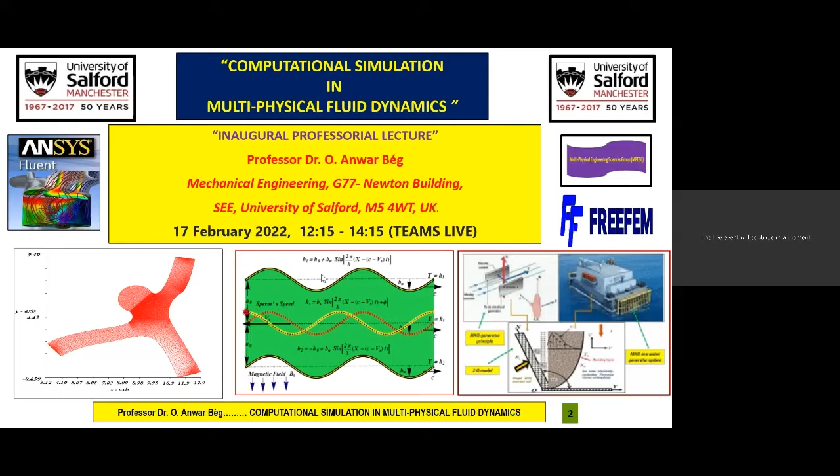Thank you, Carl, and thank you all for attending. As Carl mentioned, the focus of my lecture today is computational simulation in multiphysical fluid dynamics. And what I'll try to do in this lecture is review the kind of work we've done at Salford specifically over the last 6 years, both at undergraduate, at postgraduate, and also postdoctoral level, and also with my own research interfacing with international bodies.

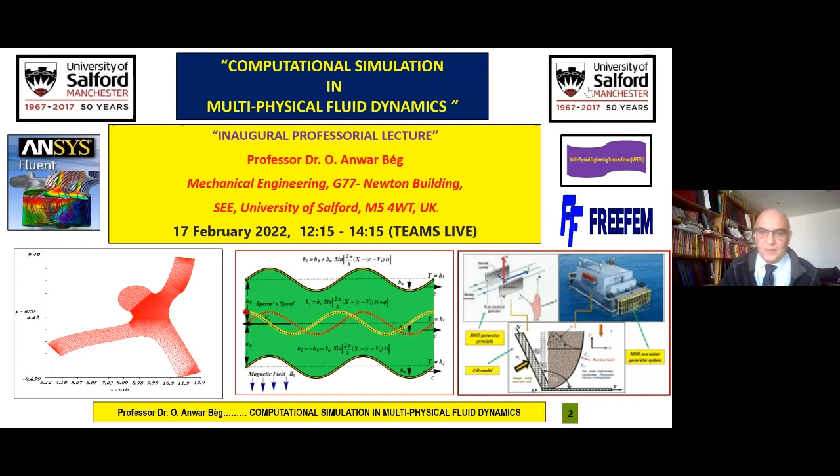I'll start off with just a summary of what it means to work at Salford University. The university motto is Altiora Petamus. My Latin is not something to boast about, but this means in English, let us seek higher things. Now, within Salford, you'll all be aware there are hundreds, if not thousands, of businesses. We're living in a global culture, but there's only one university. This gives us a very unique position in Salford and also in Greater Manchester and wider afield to develop intellectual pursuits.

And this has been what we've tried to gravitate around, certainly in the small group that I've developed, in pushing the intellectual pursuits, which will eventually develop into commercial interests. So here we'll give you some examples of the kinds of things we've tried to do. There's the coat of arms of Salford for those who are familiar with it. The presentation will comprise roughly about 5 sections.

And just to summarize, computational multiphysical fluid mechanics, which is a bit of a mouthful, really crosses many boundaries. But the 3 principal areas that I've worked in, certainly in the last 10 years, are aerospace, which includes both aeronautical and more specifically astronautical. So we are seeking higher things because we're going higher in terms of altitude, if you forgive the pun. Also energy, which is an important indicator of the global economy now.

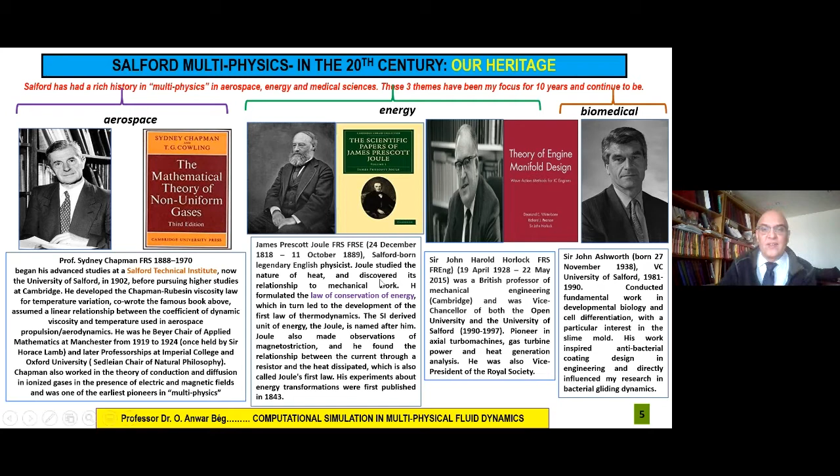At the moment, what is multiphysics in the 21st century at Salford? Well, there's 5 members of the small group that we created called the Multiphysical Engineering Sciences Group. A good colleague, Dr. Leonard, who teaches thermodynamics, Dr. Jury, who specializes in composites and structures, Dr. Kadir, who later will be accepting questions during the Q&A session with you, myself, and then a new PhD completion, Dr. Kohara, who's joined the group now and has been with us for about 6 months, but has been a student at Salford for 10 years.

So together, we try to cover as much as we can in terms of complexity and diversity within multiphysics, which you'll appreciate a little bit more when I explain exactly what it is that we do. So without further ado, what actually is multiphysics? Well, as the title implies, it involves physics, but multiple things happening at the same time.

Any student of A-level physics will appreciate there are different topics like thermodynamics, which involves heat doing work, heat transfer, which involves the transmission of heat from a hot place to a cold place. It occurs everywhere on the planet. At the moment, it's very important in climate modeling. There's also electromagnetic fields, electrical fields and magnetic fields, which kind of move like a snake at orthogonal directions to each other, but they coexist.

And the nature of multiphysics is that many things often flow. So you may have different kinds of fluids. You'll have chemical reactions, which brings chemistry into it. You'll have acoustics, which involves vibrations and sound propagation. And then you'll also have things like structures, material deformation, rigid bodies and stuff like that. So what multiphysics does is it unifies these disciplines, but not necessarily all at the same time. So it's a bit like going to ASDA and pick and mix.

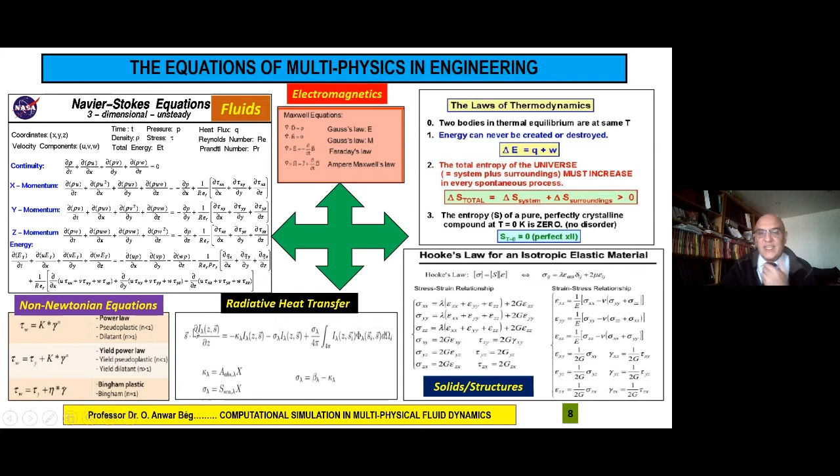And you can also have convection, which is how you get hot water. Heat moves in a cup. Or conduction, which is why your feet feel cold if you walk barefoot on the tiles in your bathroom in the morning. Heat leaves the body through solid body heat transfer. So all these things can happen. And here we'll just give you some ideas of how we've combined different components of them in our work at Salford.

So how do we actually solve those equations? Well, you can appreciate there are many equations I've shown there. And although mathematicians have pushed the limits as far as they can to get closed form or hand solutions, in the real world, when you have geometric complexity, for example, this pencil may look simple, but it's actually quite complex. It's got hexagonal structure to it. You have to use computational methods, not just for the geometry, but also to cater for the complexity of the physics. So some of the softwares that have been developed to do this kind of work are visualized here.

You've got MATLAB, which is very popular with undergraduates in the control and dynamics discipline. We also use it in fluid mechanics. ANSYS is a finite element solver. I'll explain that in due course. But this can simulate complex geometrical problems, whether they're aerodynamics, fluid mechanics, corrosion science, impact engineering, roller coasters, you name it.

As long as you can simulate the geometry, you can bring the physics together, and you can predict things like stresses, strains, velocities, pressures, the things that engineers are interested in optimizing to get a good design. There are also codes like FreeFEM, which is a French software that gives you a little bit more leeway in developing your own user-defined models, because there are materials that are emerging in industry which don't have mathematical models that have already been inbuilt into these commercial softwares. You have to write the codes yourselves.

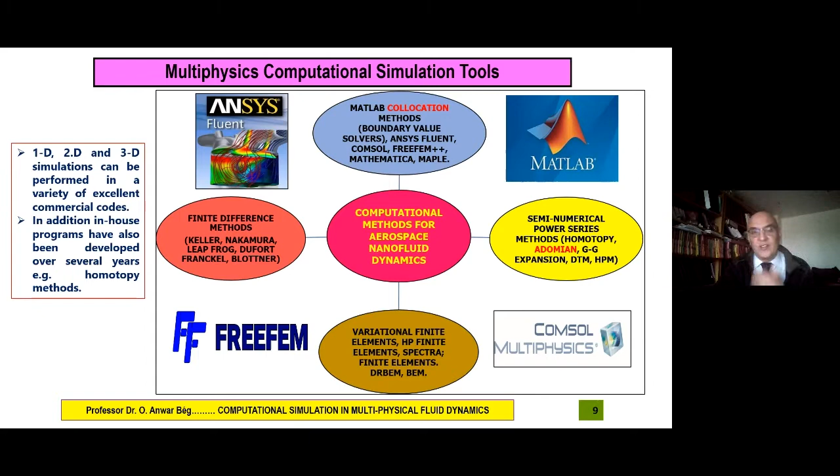Now, how do we actually solve a problem? Well, as I said to you earlier, it's a bit like going to a superstore and picking and mixing different sweets. But the basic idea is the same. You first have to define what the problem is. You have to have a physical understanding or appreciation of what you're looking at. So it might be blood flow in the human body. It might be a new green energy system like a photovoltaic cell on a facade. It might be a wind turbine. It might be a novel aircraft wing.

It doesn't matter what the system is, as long as you understand and define what you're going to simulate and what part of it you're going to look at. Are you going to look at the structural side? Are you going to look at the fluid side? Are you going to look at both interacting together? Are you going to bring heat into it, vibration into it? You have to define the problem physically first. Once you've done that, that's when you ascribe the mathematics. So the mathematics converts the physical problem into an analytical statement or a mathematical model which tries to represent what the physics is to the best of our ability. And then you can proceed with actually solving that problem.

So you need things like data, material properties. You need things like boundary conditions. What's the inlet velocity to a gas turbine blade? What's the oncoming velocity or the flight velocity of an aircraft? What's the impact force on a landing gear when the aircraft's landing on the runway? Or what's the speed of a motor car? It doesn't matter what the problem is. You have to have that data. And that's usually prescribed by virtue of experiments and laboratory testing.

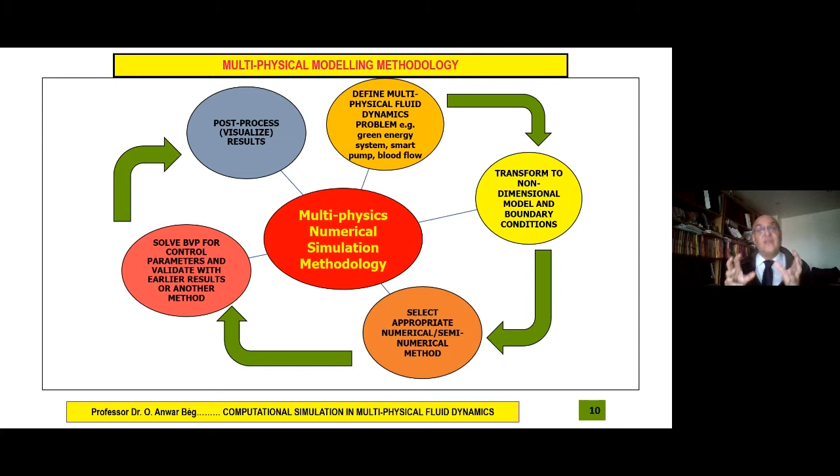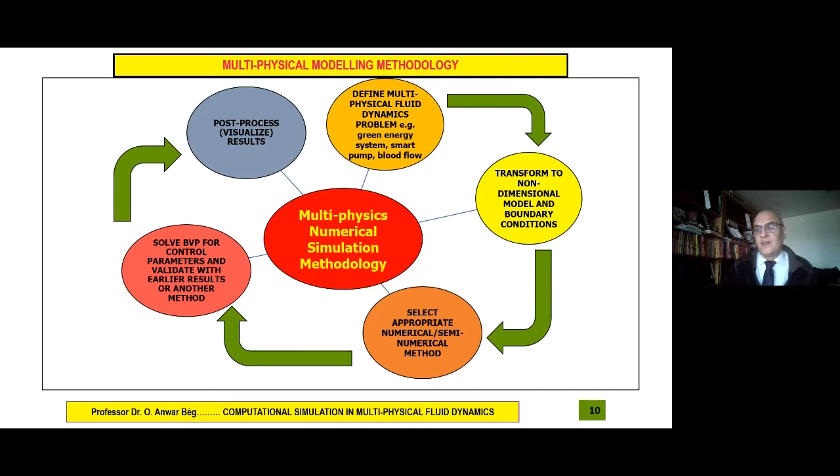So what you do is you define generically what's called a boundary value problem. It's a differential equation system. It's got the maths in there. It's got the physics in there. It's got the data and boundary conditions. And then you can solve that problem with an appropriate numerical method, of which I gave you a few examples earlier, like ANSYS or MATLAB or COMSOL. It doesn't matter what the method is, as long as it's appropriate to the problem you're trying to solve. Now, the final part could be argued to be the most exciting, which is where you visualize the results. So you show nice pictures, contour plots of what physically is going on when you change a particular parameter. That's an important point to get across.

Now, over the last 10 to 20 years, I've worked with many different groups. Carl mentioned a few of them in his introduction, but these are largely international, and the different areas we've worked in. So with Dr. Khan, I've been working in hybrid fuel cells and dielectric materials. He's based in Scotland, Robert Gordon University. Another example is Mr. Mohammed El Gendy, a former MSc student who works for Alkan Medical. We've done a lot of work together now in medical engineering simulation. Most recently, COVID.

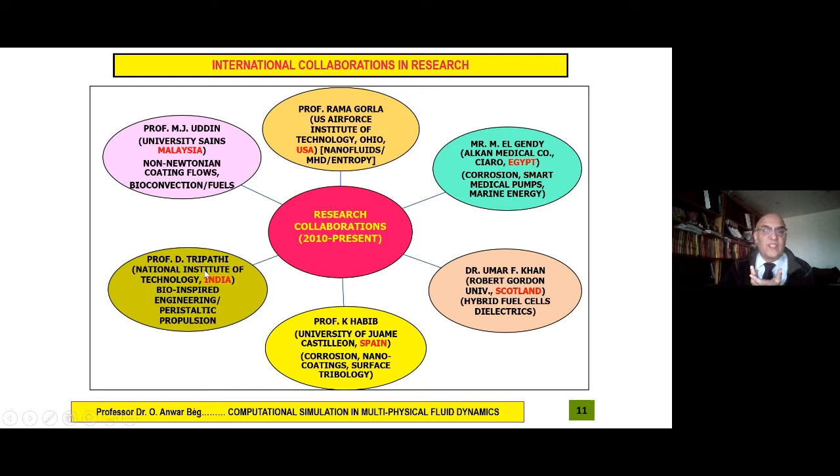With Professor Rama Gorla, a very distinguished engineer from the United States, we've worked on nanofluids. He's based at the United States Air Force Institute of Technology. And with various other individuals like Professor Habib in Spain, Professor Tripathi in India, and Professor Uddin in Malaysia, who looked at non-Newtonian flows and corrosion, and also other aspects of electromagnetics.

So just to quickly summarize the kind of work we've done in the last 12 years, which is what this presentation is really focused on, is aerospace, energy, and medical engineering. And I've extracted a couple of examples from each just to give you a flavor of the type of work we've done, to share with you the kind of learning that we've tried to develop. But the main focus really in aerospace is high temperature, things like nano coatings for gas turbines, which is the research interest of Dr.

Kadir, but also we're interested in things like rocket fuel tank sloshing, rocket splashdown. If you've seen the movie Apollo 13, you'll recognize when Tom Hanks descends into the ocean, that kind of thing, but also novel functional materials which respond to their environment. They're intelligent materials. This is what's happening in modern aerospace.

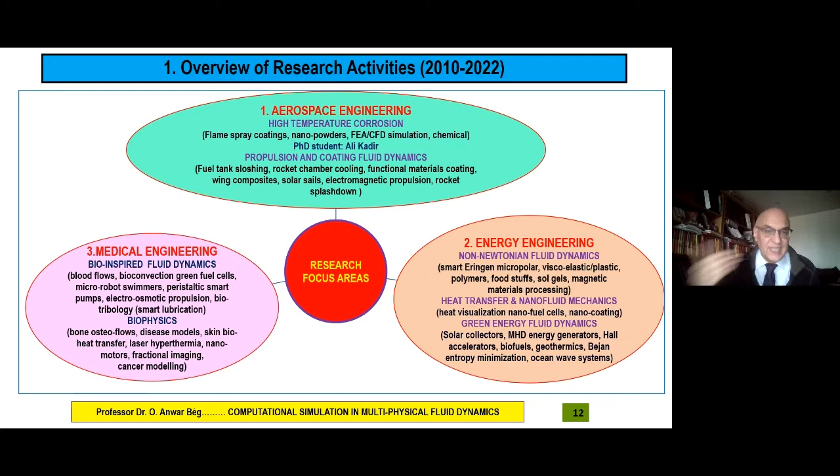In energy, we've looked at non-Newtonian materials processing, sol gel coatings for photovoltaic collectors, geothermal engineering, and also entropy minimization in various branches of green energy. But a big area that we've really begun to mainly focus on since the pandemic has been bio-inspired fluid dynamics, where we're using ideas from biology to improve engineering systems, but we're also modeling biological systems as they are, things like blood flow through the heart or kneecap injuries, things like that.

So the 4 examples that I'll share with you, you'll appreciate, I could have selected from over 600. All were published in journals, so it's a very small snapshot of what we've done, not just at Salford, but in my entire career. But they're quite generic in the sense that the approach is similar, but different aspects of multiphysics have been used, and they've all been inspired by real problems. So the first case I'll look at is the water ingress problem, which Carl mentioned, to do with ice melting and how it penetrates composites, because increasingly aircraft engineers are using composites.

Then I'll quickly mention the bio-inspired peristaltic pumps, which is where you're using an idea from swallowing, how the human being swallows through the esophagus, to propel liquid. It's the most efficient mechanism for internal fluid propulsion known in nature, and it's being used by NASA at the moment in designing rocket turbo fuel pumps. Then we'll mention things like magnetic blood flow control, where you impose an external magnetic field. It's called biomagnetic therapy, and this can help patients who have weaknesses in their arteries, and it can save their lives.

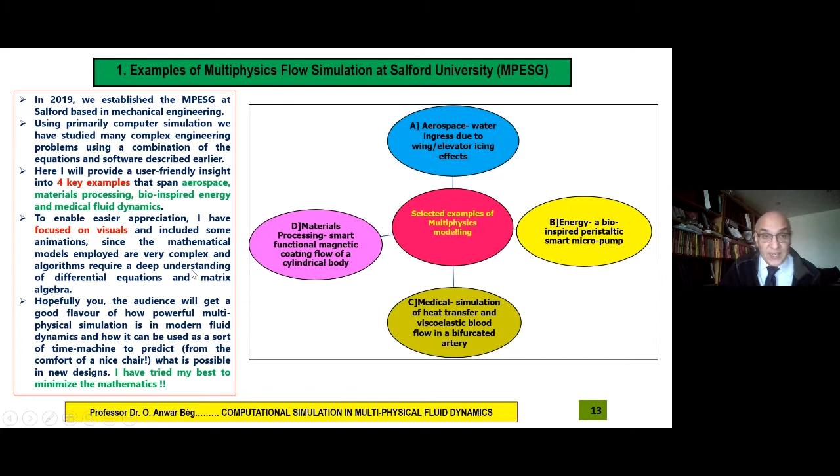And then finally, we'll look at a smart functional coating problem for the naval industry, where we've used a novel design from California, an electromagnetic non-Newtonian polymer known as a hydrogel, and how it's manufactured. So I've tried, as I've said, to keep the mathematics to the bare minimum, but I apologize in advance if the mathematics is a bit hard. So starting with the first problem, which is aircraft elevator moisture ingress.

Anyone who's ever flown in an aircraft knows that the commercial aircraft can fly at 25 to 30,000 feet in altitude. That's where the temperature drops, so ice builds up significantly. Now, this alters the aerodynamics of the wing and also other parts of the aircraft. So often engineers think about only the wings, but one has to remember at the tail of the aircraft, you've got things like rudders, elevators, stabilizers. These are critical to the stability of the aircraft, and often ice builds up here rapidly. So this is a very dangerous issue because it not only affects the aerodynamics, but it can damage the control mechanisms in the aircraft, and pilots have to compensate for this. So this is what inspired our study in this area.

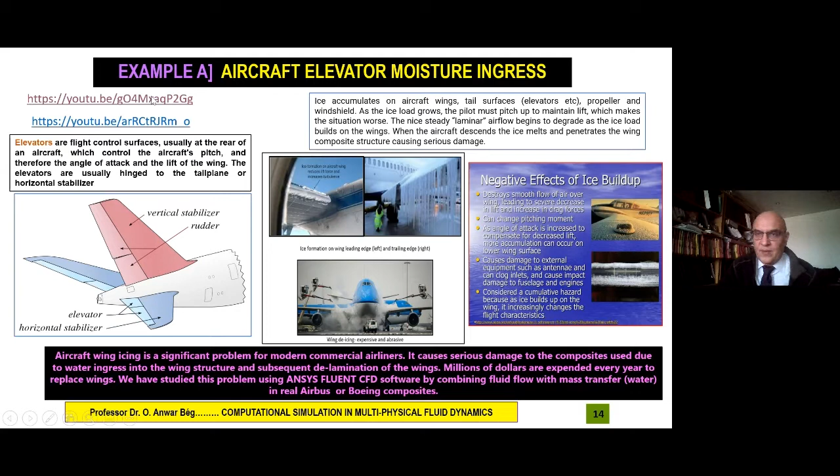And I'll quickly share with you an animation just to give you a flavor of what actually happens. If you just bear with me.

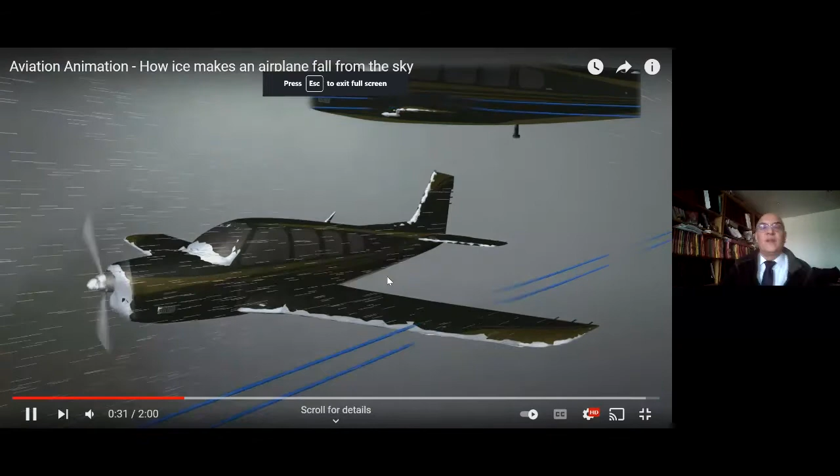Here's a quick aviation animation showing you how ice actually builds up on an aircraft. And you can see that even a small aircraft like this, ice accretion is developing very quickly and is building up in specific parts. This affects the aerodynamic profile, but it also affects the structural integrity of the materials that are being used, because when the ice melts, when you descend, it penetrates into the composites. There's a quick example there.

I'll just unshare that and go back to the presentation, if you just bear with me. So back to the presentation. So just to move on.

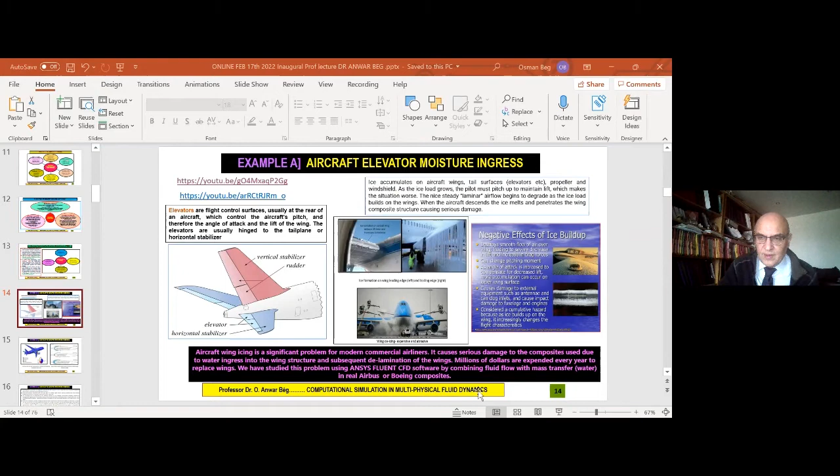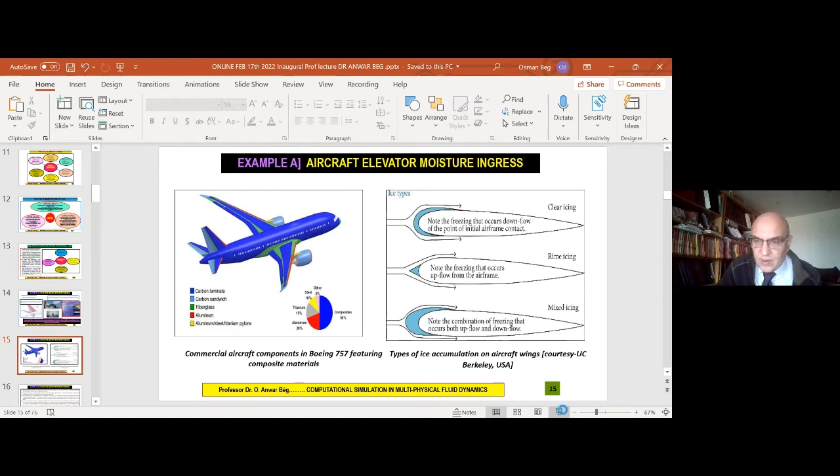This gives you an example of the kinds of ice buildup that can occur in these kinds of systems. Different types of icing can be built up, and it affects the different kinds of composites that are being used. I'll just maximize the screen. Yeah. So you can see here clearly that it's a significant problem. And there's an example of the Boeing 757.

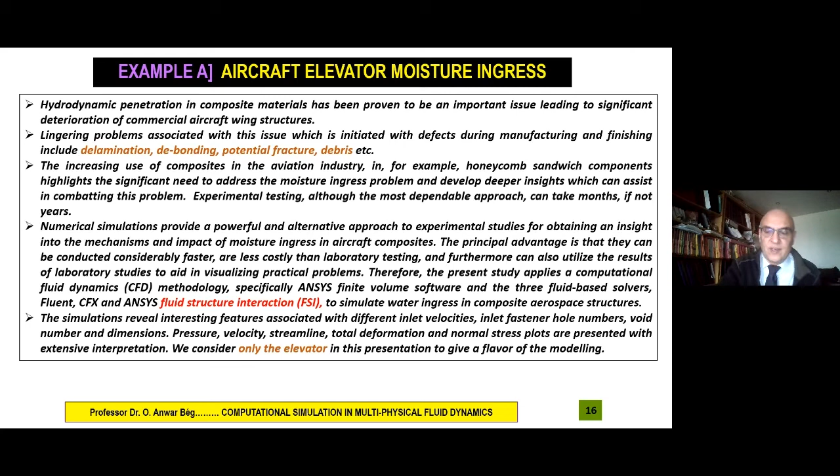But what was our motivation? Our motivation is basically to try to simulate as realistically as we can what is actually happening to a component on the aircraft. We chose the elevator, and here you have multiphysics, because not only do you have airflow around the elevator, as can be seen here, but also you've got water penetrating inside the composite, which is a different fluid. And you've also got the structural composite matrix itself. So these three things are occurring at the same time in real time. And the easiest way to simulate this is with finite element methods.

So this is why we've chosen that particular example. And this is our geometric model of the elevator. So this is what we're looking at, this section here, and this is the geometric model in a software ANSYS. And then we have to use a particular methodology to solve the problem.

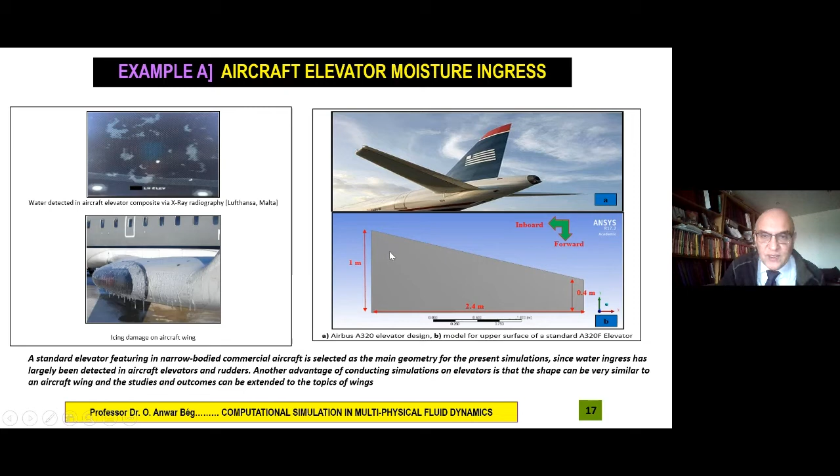Once you've done that, you have to solve the problem. That's just the geometry, known as pre-processing. You have to solve it, and to do that you use matrix theory. So the numbers are compiled in special arrays known as matrices. Thousands and thousands of equations have to be solved. So you convert differential equations into algebraic equations. And then you get the nice pretty pictures at the end of it, which is called post-processing.

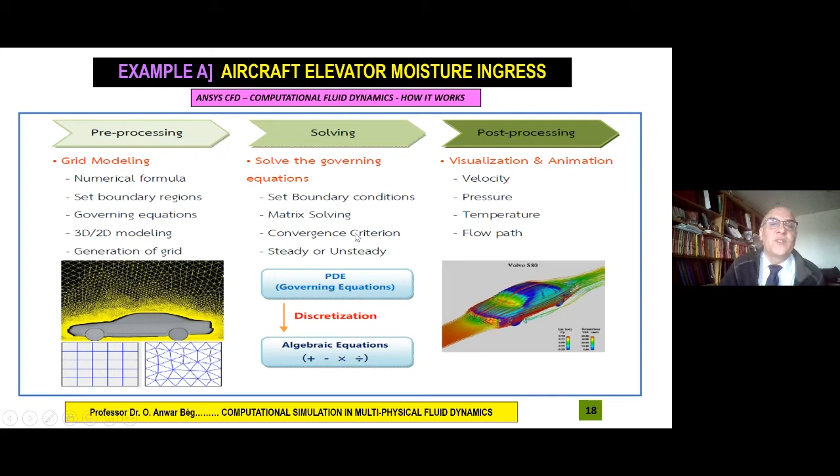So this three-stage process. So the multiphysics for this particular problem was Navier-Stokes equations, which you can see are formidable equations. No one in the world has ever solved them analytically, and it's not likely that they will. But you use numerical or computer methods to do this. Then also you introduce mass transfer, because you have a separate fluid, which is the water. As the phase is changing from ice to water, it's melting, it penetrates into the composite.

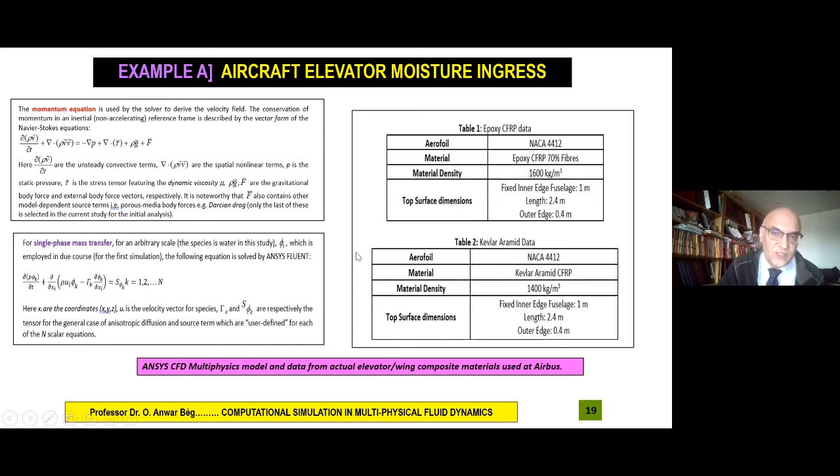Then you have the properties of the composites. Epoxy CFRP, 70% fibers, or Kevlar aramid CFRP. There are different materials that are used in the aerospace industry. But once the two things interact, so you've got water penetrating inside the composite, and the composite is being stressed. So you've got a fluid problem and you've got a structural problem happening in real time at the same time. This is why it's called fluid structure interaction, and is an example of multiphysics.

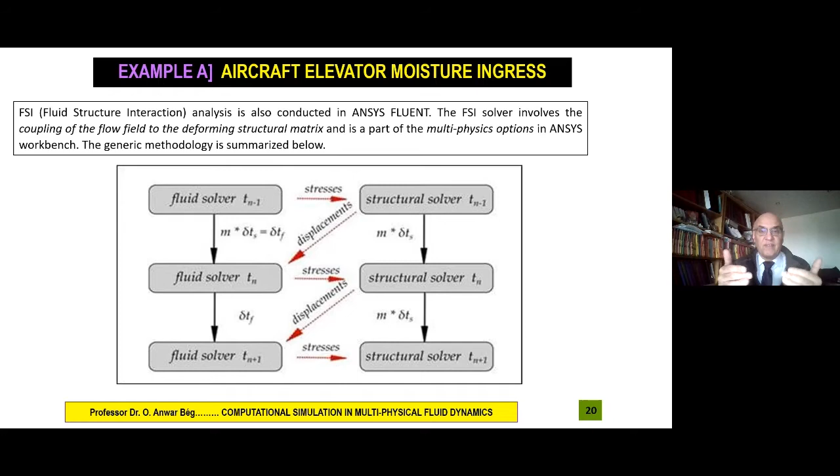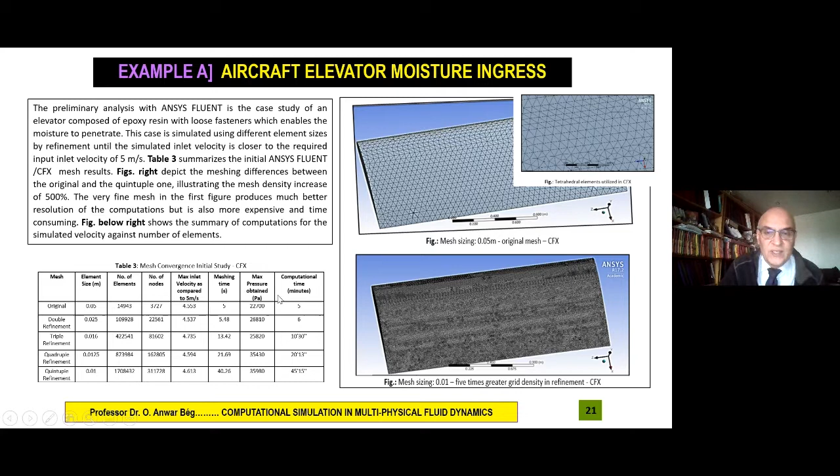So the algorithm that's used in ANSYS, you compute your velocities, then you compute the stresses. Then the stresses affect the velocities, and it goes to and fro until it converges and you get a solution. So what kind of solution are we looking at? Well, first we had to build a mesh, make sure that the number of elements was correct, was giving us the right answer. This is known as mesh independence. Then we had to prescribe different kinds of meshing times. So this is all part and parcel of how simulation is done. And then we produce the results.

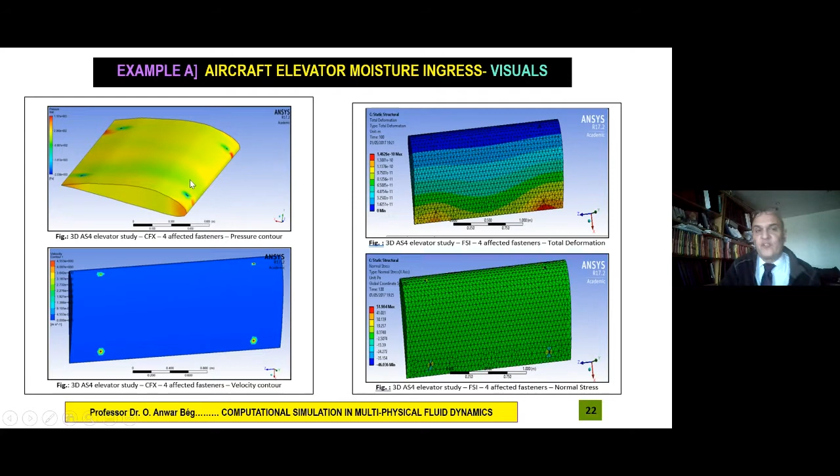So here you can see the three-dimensional simulation of the elevator. And this is undergraduate work, by the way. This was developed from an undergraduate project that I supervised. So this is static structural deformation. And here on the left-hand side, you have velocity contours. So you have a real 3D body. You have holes in it as well where it's fastened. And then you can introduce the ice through penetration when it's melting and it enters as water. And you'll find, just to summarize, that when you use three different kinds of composites, you get three different patterns in the water ingress. You don't get the same prediction.

Now, to do this kind of test in the laboratory would take months, if not years. The benefit of CFD, or computational fluid dynamics, and computational simulation is that you don't run it in real time. You use artificial time on your computer, and it can save you months and months of grief. And this is one of the benefits. And you can visualize multiple scenarios again and again. So if you want to redo the simulations, you just go back and change the data. You don't have to go into a laboratory and redo everything from scratch.

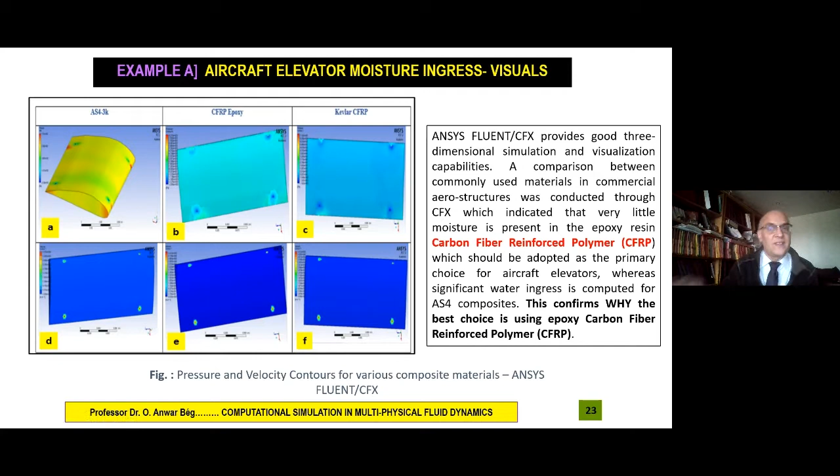So what we showed in this work, which incidentally won the Royal Aeronautical Society Teddy Fielding Prize for the student that did it with my supervision in 2016-17, was that epoxy carbon fiber reinforced polymer is the best choice, but it's not being used by all the manufacturers at that stage, and we've recommended it to them. So that's one example of how to do multiphysics.

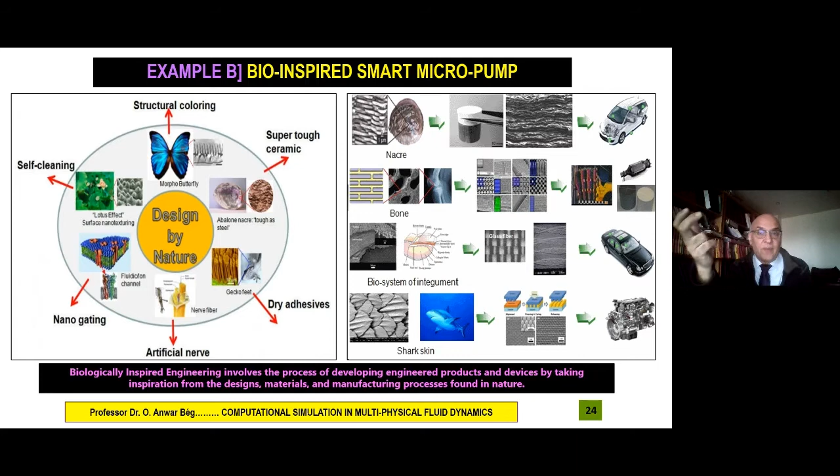Next, we'll look at bio-inspired engineering. So what does this actually mean? Well, in a nutshell, what it means is copying nature. Human beings have been flying since the Wright brothers with powered flight for just over a century. I think it was around 1903 in North Carolina.

But birds and other animals and insects have been flying for millions of years, so they're obviously better at it than we are. We can learn much by studying nature. So this is what the whole subject of bio-inspired engineering means: studying nature, identifying very efficient mechanisms or techniques that we can mimic in our engineering discipline.

So a quick example of that is the human bone. It's the most efficient composite known to humanity. It supports a human body through the spine and through the femoral bones and all the other parts of the body. There are 206 bones in the body, and it can last for up to 70-75 years without serious issues. No other manufactured composite, which is where you combine one material with another in engineering, can match that.

It's the same with the human eye. It's the best camera in the world. The human ear, the best acoustic receiver in the world. And there are other mechanisms that we can talk about, things like shark skin, which is now being used increasingly in inspiring aircraft wing design because it's got properties that the artificial materials we use just can't match. So this is what bio-inspired engineering is about, taking ideas from nature.

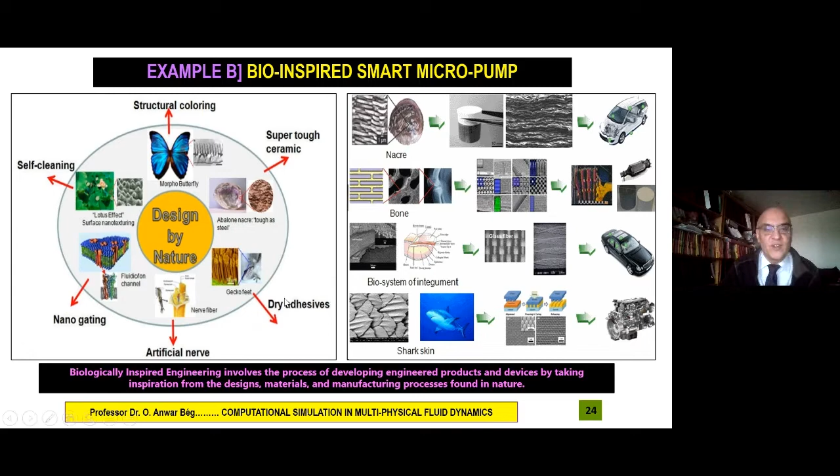So in this example, what we did is we looked at one particular mechanism. Every human being obviously has an esophagus or a food pipe; this is how we swallow. So it moves in a rhythmic action. Now, I'll very quickly share an animation with you to show you how this works. It'll only take a few seconds.

Wrong animation. Should be able to see it now.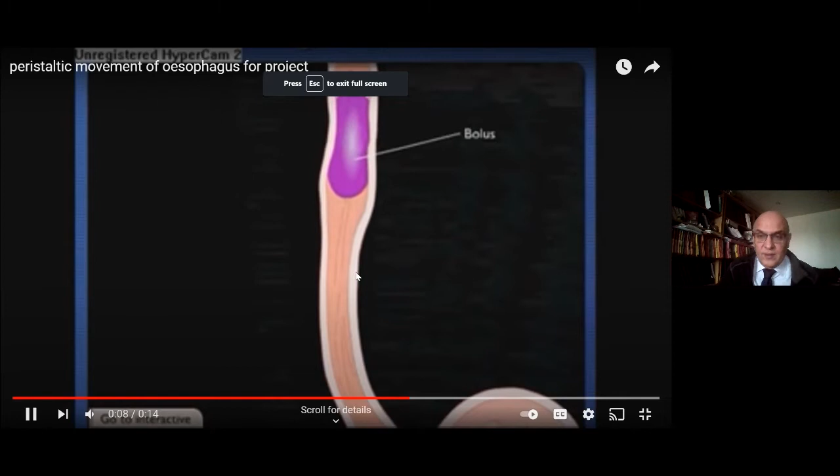Yep. So this is the mechanism that we're talking about. That was a quick example of how peristalsis works. So I'll just share my presentation again with you very quickly. So it's the rhythmic contraction in the human esophagus. And we can use that idea to design novel pumps or smart pumps.

And the beauty of that idea is that you don't need working parts and you don't need to maintain the pumps because they naturally lubricate themselves. And this idea is now being adopted in fields as diverse as food processing in the manufacturing industry, robotics for limb motion and mobile robots, and also in the aircraft industry and the spacecraft industry and things like turbo pumps. So it's a multi-physics problem because the geometry is deformable.

That's the first point, which is complex wavy wall motion. On top of that, you have non-Newtonian fluids inside, because many of the gels and the fuels that are being used are not water. They have special viscous properties. So that involves fluid mechanics and non-Newtonian fluids. And then because the actual material is deforming as well in the boundaries of the conduit that you're pumping fluid through, then you also have stress analysis. That's why this is a three-dimensional multi-physical type problem.

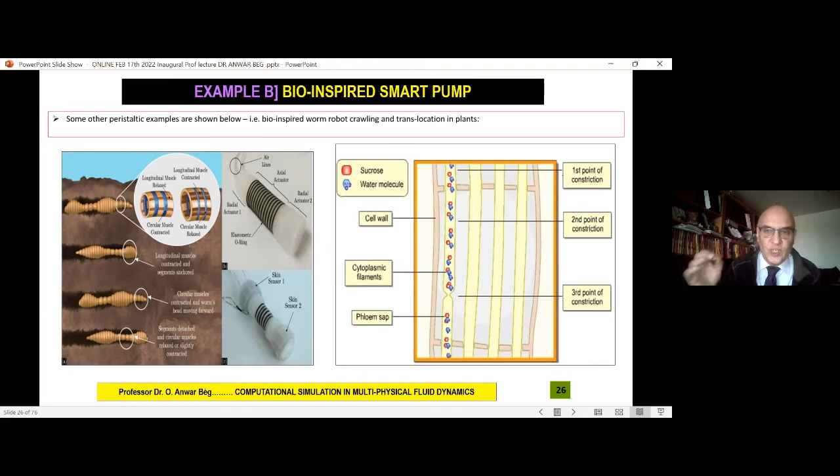Now, there are other applications of this. For example, how worm robots crawl through the earth. They're obviously inspired by real worms, but also the mechanism by which water is pumped up a tree from the roots to the leaves is known as peristalsis. It's called translocation in plants, so it's a universal phenomenon, and it's extremely efficient, which is why nature uses it.

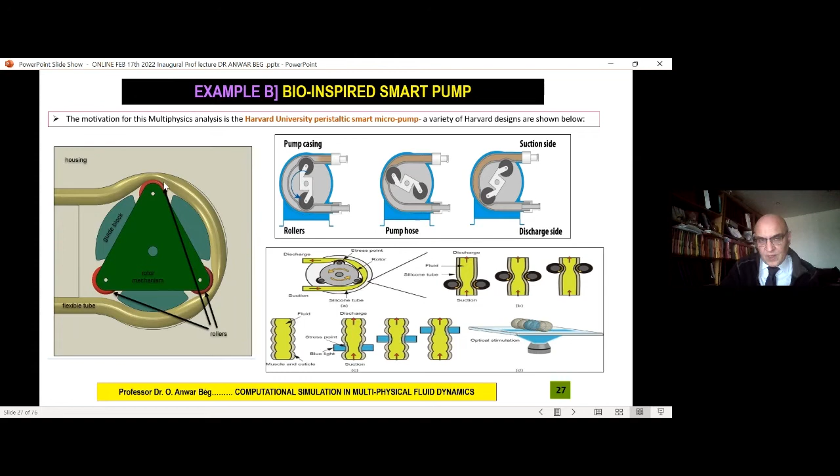But this is what we did. We were inspired by looking at the Harvard University peristaltic pump. The experimental work was done at Harvard, and we got interested in this in an MSc project, which Mr. Gendy did 5 years ago under my supervision at Salford, and we simulated the problem using ANSYS multiphysics. So this gives you an idea of how you've got a tube that can deform and can pump fluid around in any direction you want.

So the basic idea was to geometrically simulate the problem first, so you can see that it's a deformable wall. So this is peristaltic pumping. The fluid is being pumped from one part of the system to another part using wall deformation. It does not involve piston motion at the start of the pump, which is the standard method used in pumping, or pressure dynamics. It just uses the wall deformation.

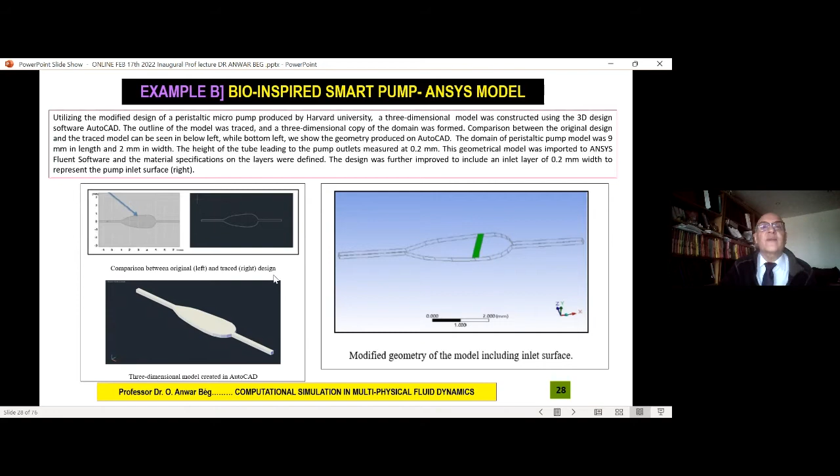The physics involves mathematics as well, so we have to solve Navier-Stokes equations for fluid flow, which are like Newton's laws of motion and the mass conservation, but we also have to use non-Newtonian models. So the Carreau viscosity model is used for pumping blood. Another model is the power law model. And these involve modifications to the existing Newtonian model.

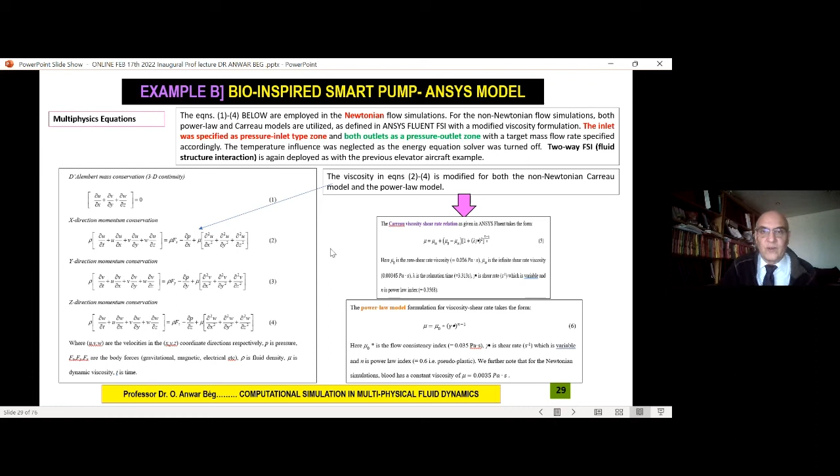You have to simulate the problem as accurately as possible, and we used millions of elements to do this. You can see we went as far as 1 million elements in the simulation. But what we found was that when you get to about 400,000, 500,000, the accuracy is sufficient. The convergence has occurred and we're happy with the results. And then we can study different scenarios.

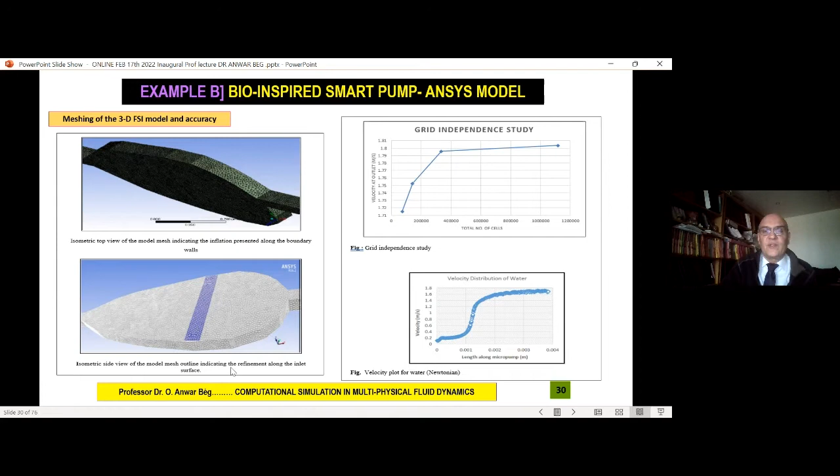So for example, we can look at velocity distribution for different kinds of models, and then we can visualize what's happening. So this is another very important part of computational multiphysics. It turns the physics and the math into pictures, which allows people, designers, to see physically what is going on.

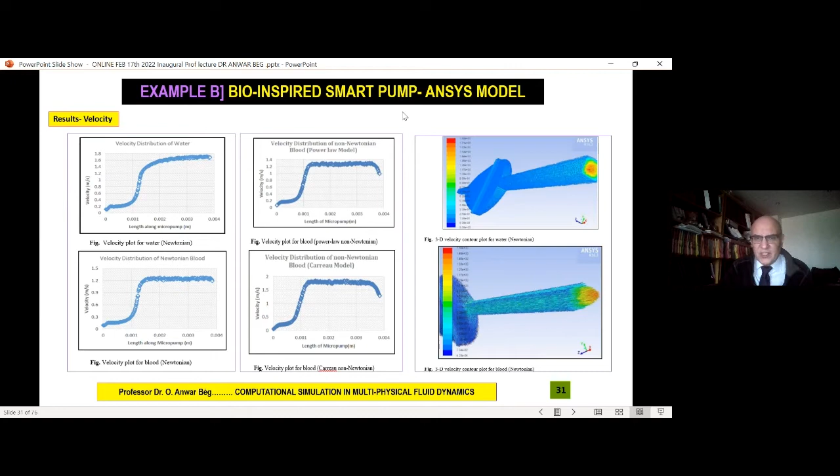It's a little bit like watching a movie, and you can tell by studying these pictures what the best combinations of the different fluids required are, what the rate of pumping should be in terms of deformation of the walls. Should there be sinusoidal waves? Should you use triangular waveforms? Whatever combination you want to do, and you can compare them, the different kinds of materials that are being pumped, to design more efficient systems for industry, for specific applications.

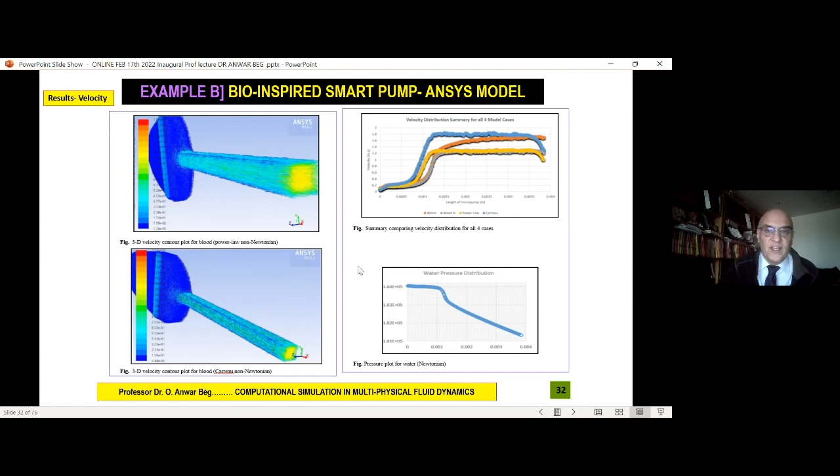So I haven't dwelt too much on the actual physics behind it because of shortage of time. I'm just giving you a visual flavor. And here's some more examples of pressure and vorticity. And then close-ups, you can zoom in if you're interested in a particular aspect of the problem.

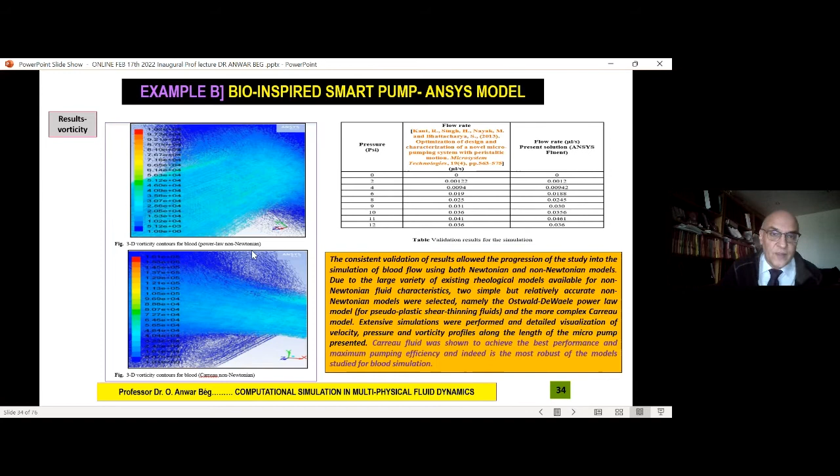And what we found when we compared it to the experimental work that was done by Harvard is we got very, very close accuracy, which validated the work that we did. It was the first time anyone in the world had ever done this kind of problem with simulation in 3 dimensions for a peristaltic pump. We also showed that the Carreau fluid was the best performer, which we recommended to industrial organizations, including Alcan Medical, which is where the person who collaborated with me on this is actually a director now.

Now the third example is again to do with medicine, but not necessarily just pumping fluid through pumps, more to do with what's actually happening inside the body. Because the human body has hemoglobin inside blood cells, the iron content responds to magnetic fields. So if you apply an external magnetic field around a human being, and this is also done in nuclear magnetic resonance imaging, which was developed largely by Sir Peter Mansfield, who won the Nobel Prize for it in 2003, you'll find that you can actually manipulate blood flow to your advantage by changing the strength of a magnetic field.

So in this particular problem, what we were interested in is a weakness in the arterial wall. And that weakness is known as an aneurysm. What happens if the wall is weak? It can blow up into a balloon. If that balloon suddenly ruptures, the human being can pass away. So it's known as an aneurysmic fatality. So we can control the pressure in this, because the patient may be 60 to 70 years old, to the best of our ability by using magnetic fields.

And in this particular model, we simulated it first in 2 dimensions. So we had to add the multiphysics of magnetism with fluid mechanics and also heat. When you eat food, one of the byproducts is heat. It generates heat in the body and the blood can conduct heat, which is why you feel better after eating than you do before usually. So heat transfer was also important in this. So it's a triple multiphysics problem. On top of that, we used nanoparticles, which are now being introduced in medicine to control diseases.

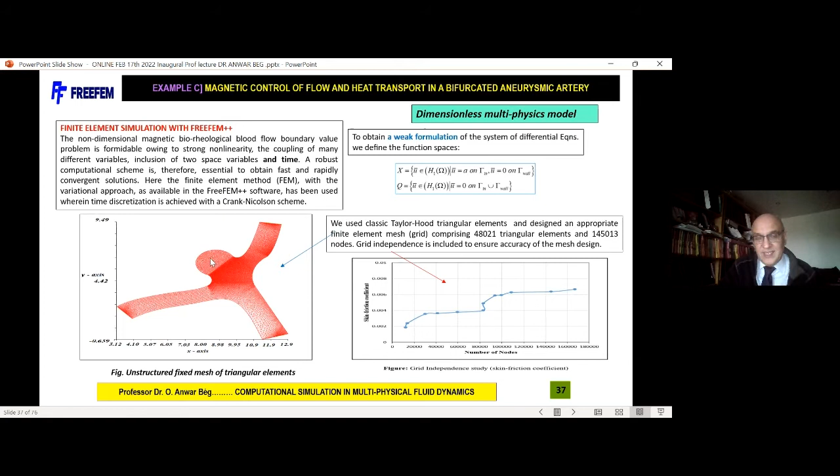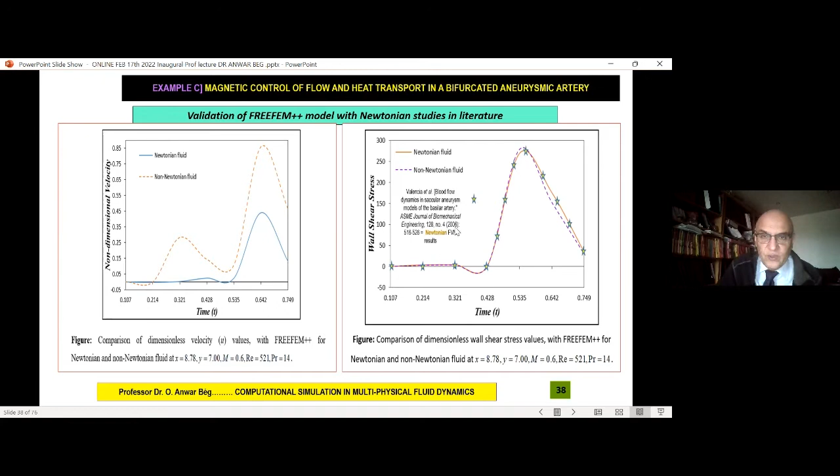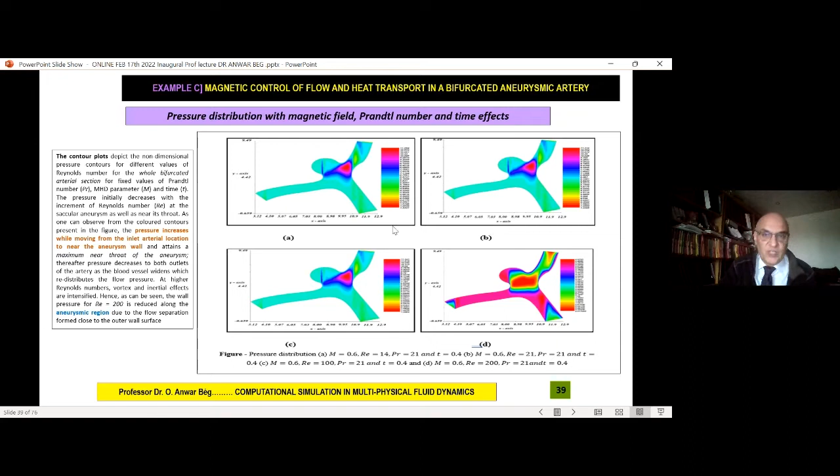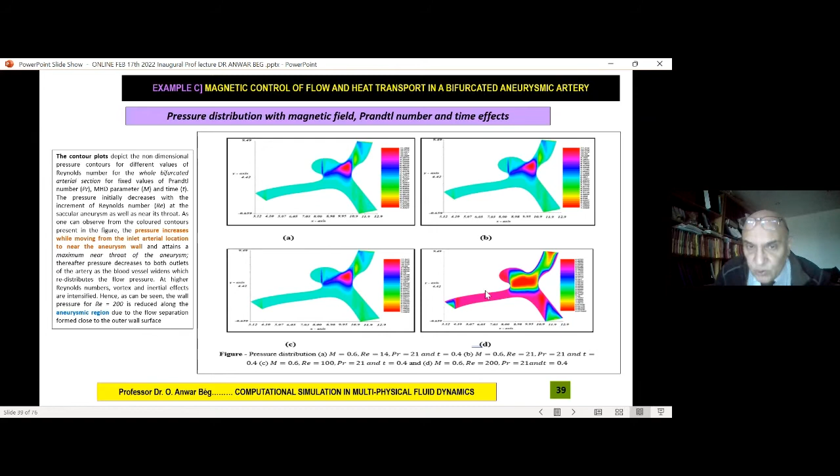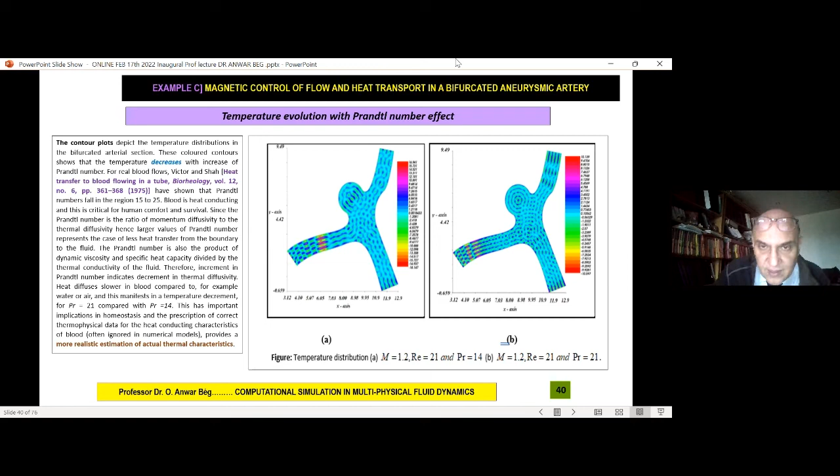Then we looked at things like how does the magnetic field affect the pressure distribution or the velocity distribution, and you can see as you change your Reynolds number, for example, which is what's happening from these plots, the fluid is moving faster, the velocity distributions are changing. But the main thing we wanted to show was that the temperature also changes if you manipulate the viscosity of the blood. This has a contribution to shear stresses and the mechanical integrity of the aneurysm itself. So we've homed in here on just the temperature patterns.

But the main thing we wanted to share with you is that when you increase the external magnetic field, look what happens to the flow rate. It drops dramatically. Just by an external bracelet, you can change the flow rate near the aneurysm.

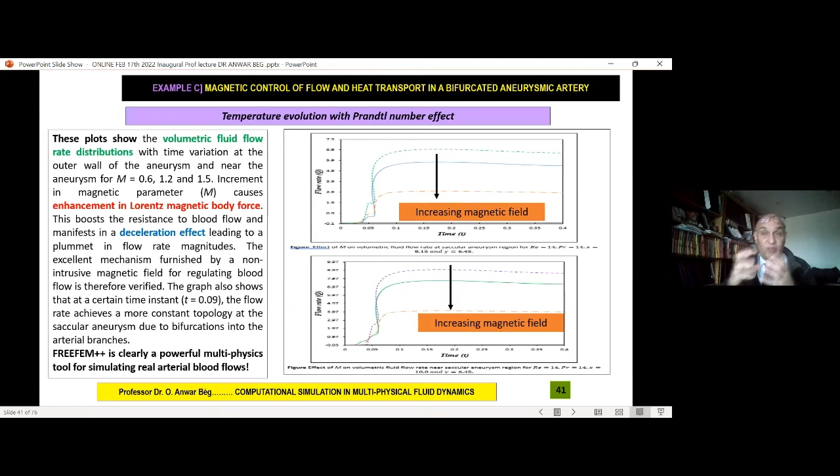That means that you can reduce the likelihood, because when the flow rate is high, the chances of that balloon rupturing are much higher. So there are clinical implications to this work, and we proved it using multiphysics. As the field goes up, the volumetric flow rate goes down, and that happens through time.

The final example I'll share with you is on advanced magnetic functional coatings. Now, these are special kinds of materials where they have inbuilt properties, so you can manipulate them with external magnetic fields, with external electrical fields. You can even use light. They can become photosensitive, or you can use vibrations, things like acoustics. So this is the latest generation of materials that are being developed.

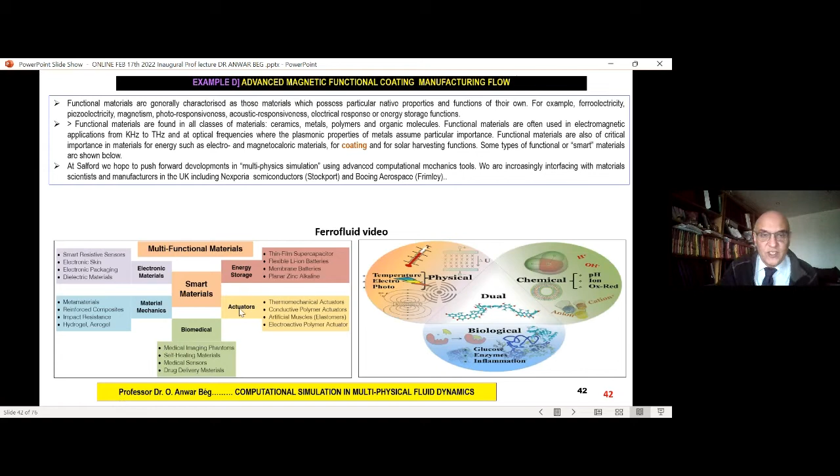And one of the leading institutions in the world is the California Nanoscience Center, which is based, I believe, in Berkeley and the University of California system. We've also explored this with undergraduate projects and MSc students. So the example I'll share with you, I've been really inspired by these applications.

So things like how to coat wind turbine blades so they resist weather damage and last longer, which reduces the costs of maintenance, and also magnetic actuated blades, intelligent materials that are now getting to a level where they're programmable materials.

So when I was a young man, one of the big movies that came out was Terminator 2 in 1991, and it literally blew everybody's socks off. It's a milestone in cinematic CGI because it introduced the T-1000, which is a shape-shifting, morphing liquid metal robot. And this is the level that materials has actually progressed to as we speak. This is what's coming out now in science.

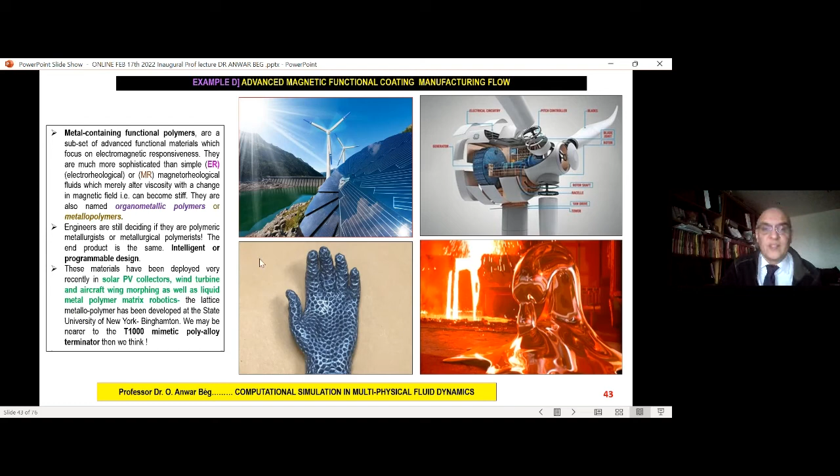So what we're trying to do is simulate this kind of problem with fluid mechanics. And an example of that is shown here, where you have a cylinder and you're coating it with multiple layers of this complex Williamson organometallic composite, which will respond to magnetic fields and it will give you better performance in the particular deployment you desire to do, whether it's naval.

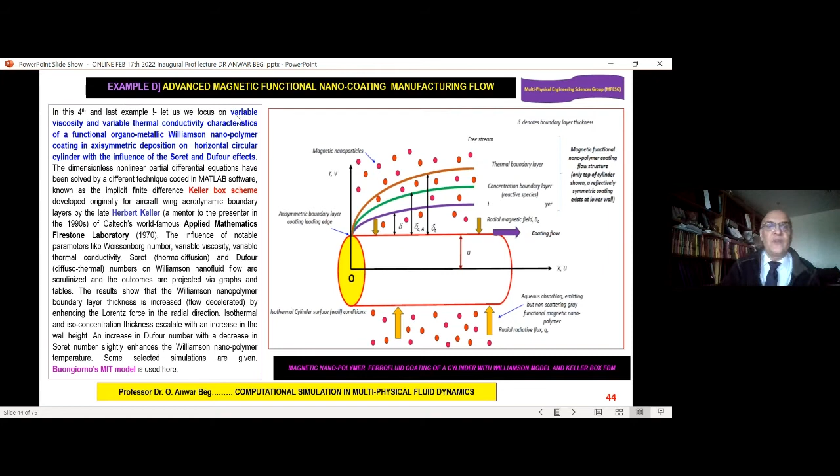It'll reduce corrosion rates, penetration of pollutants. It will also optimize the thickness naturally. It's a self-intelligent material. So how do we simulate this? We need equations. So the multiphysics is done with momentum, heat, temperature, and mass transfer concentration. You need boundary conditions, but then you have to solve the problem.

And in this case, we had to use what's called the Keller Box Method, developed by the famous mathematician Herbert Keller at Caltech in the 1970s, because it's one of the most accurate ways to solve that kind of problem, better than ANSYS and a lot of other softwares. And then we have to characterize the problem.

So you'll see here we've got things like Weissenberg number, which is for elastic effect to viscous effect, buoyancy ratio, Brownian motion for the nanoparticles that are embedded inside the coating. And then we can visualize this.

If you increase the magnetic number, in other words, the magnetic force that's applied relative to the viscous force, you'll find that as you move along the cylinder, which is this coordinate xi, you will change the skin friction just by changing an external parameter. You can't do that with conventional means. This is why these are smart materials.

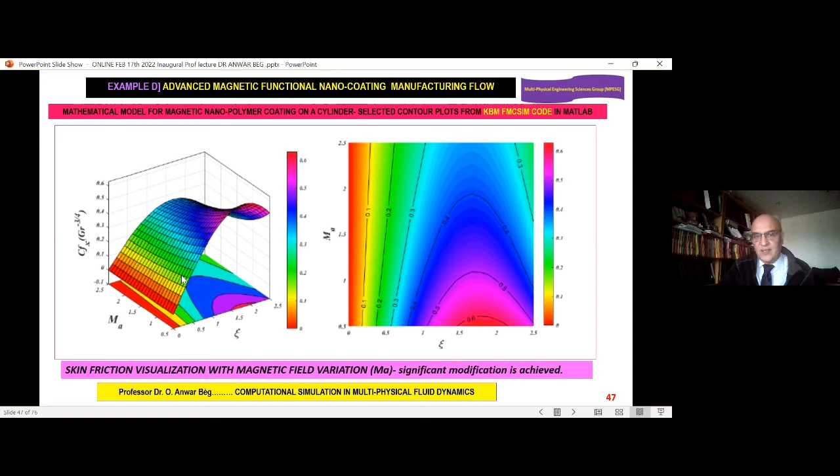And then you can visualize it as well in 2 dimensions and show the pattern. So not only can you do the multiphysics, but you can visualize it as well. And we used MATLAB to do the visualization for this. So we see significant modification along the cylinder is achieved by just changing one parameter, which is this parameter, the magnetic one, magnetic force divided by viscous force.

And then you can look at things like heat transfer rates. How does heat move? So can that material be used for insulation purposes or as a fire protection mechanism, things known as intumescent materials? And what we found is that you can achieve that as well by manipulating the magnetic field. You can change the heat transfer rate.

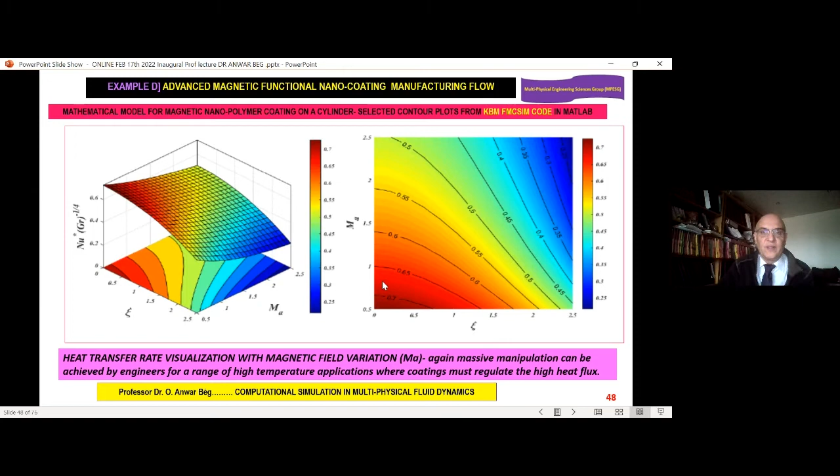Massive manipulation is possible. And similarly, by changing the nanoparticles that are embedded inside it, you also get a dramatic change. So that sort of visualizes the temperatures and the concentration of particles as well. All of this is achieved in multiphysics.

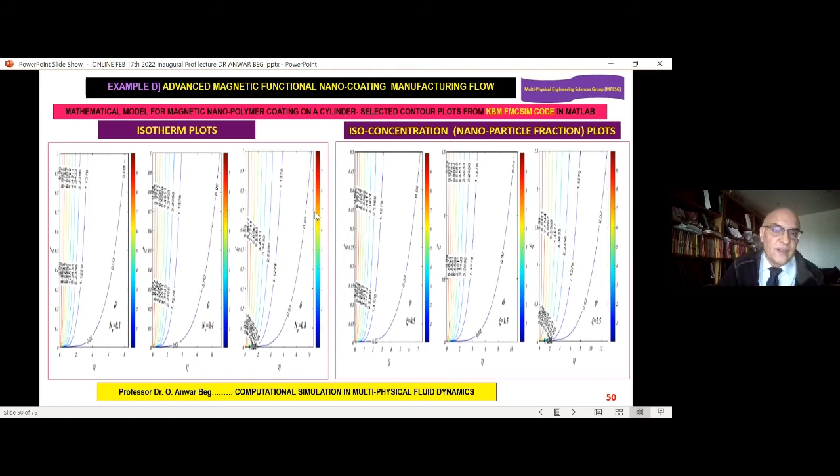And we also extended this by looking at the spin of the nanoparticles. We presented this work at Oxford a couple of years ago with Dr. Kadir and Dr. Kuharat. And we used another model which wasn't available and still isn't available in MATLAB or ANSYS, which is known as Eringen's model. So what that model does when you're coating, it includes spin of the actual particles.

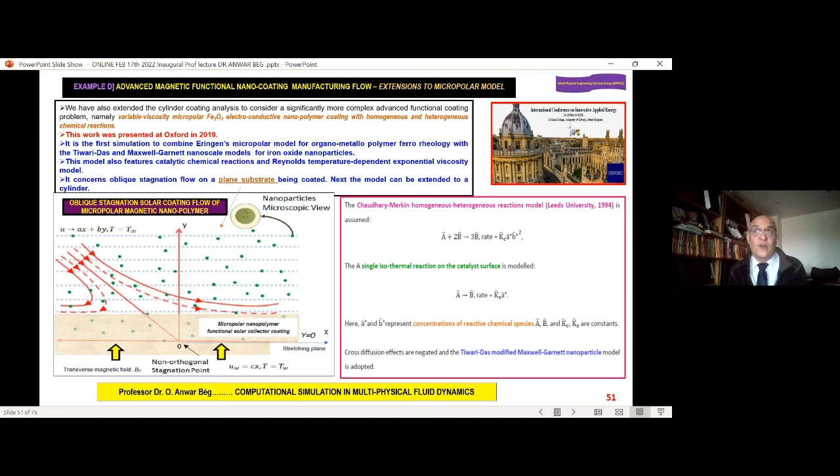This is not available in the standard Newtonian model or any other non-Newtonian model. The only way you can do it is by introducing what's called microelement gyration tensors, where the particle itself spins. And incidentally, this has a very dramatic effect also in blood flow. The reason that blood is efficient is because it has that mechanism.

It's called the Fåhræus–Lindqvist effect, and it allows blood erythrocytes or blood cells to squeeze through very small gaps. That's how the microcapillary action works in the human circulation. But the only model that can do it in terms of multiphysics, without actually having to simulate every single particle, is the micropolar model. So this is the kind of work we did for that.

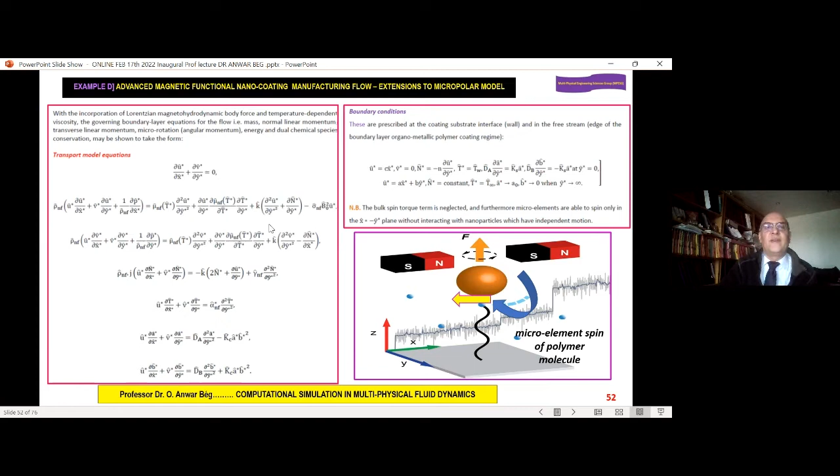Now, very quickly moving on to some of the projects we've supervised. In a postgraduate level, MSc and PhD, we've looked at things like flying cars using CFD, electromagnetic propulsion for spacecraft. Amr did that a few years ago. We've looked at rocket functional graded materials, where you have metallic, ceramic composite layers for launch pads. Alex looked at carbon nanotubes in wing structures. All these projects were supervised by me. I'll share a few examples with you in due course.

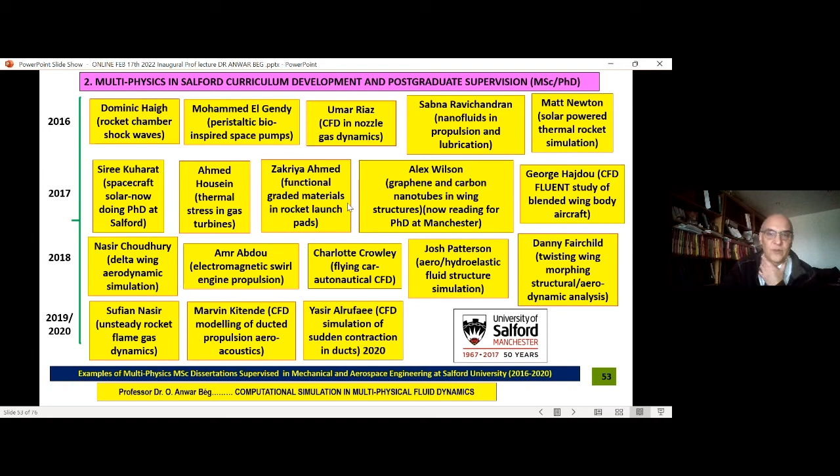So this one was done by Sabna Ravichandran, who was very interested in landing gear, but specifically for spacecraft. When you're dealing with other planets, you've obviously got a different gravitational regime. So you need shock absorbers that are 10 to 20, if not 50 times more efficient than what you've got on a commercial jet like a Boeing 757 or an Airbus 320. So to do that, we had to use electromagnetic nano-functional lubricants for the shock absorbers.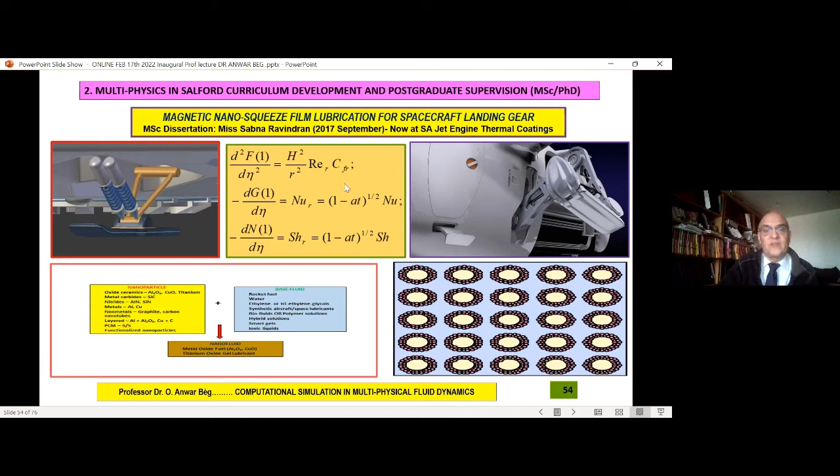And this actually was instrumental in getting Sabna a job. And now she works in the area of jet engine thermal coatings, but is also interested in moving forward into spacecraft. Another project was how to reinforce modern aircraft wings using nanotubes.

So the Nobel Prize in Physics was won at Manchester in 2010 for graphene, which is a two-dimensional nanomaterial. If you wrap it into or roll it into 3 dimensions, you get a nanotube. This thing practically weighs nothing, but as you can see here, is approximately 100 times greater the strength than aluminium. Now, classically, aircraft were built out of aluminium in the start of the 20th century and were moved into composites really in the last 20, 30 years.

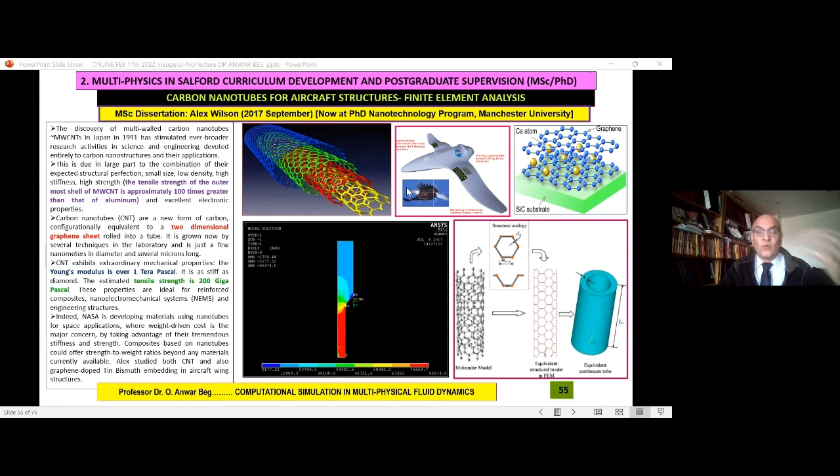But for sheer strength to weight ratio, there is nothing on Earth that can match nanomaterials. So this is why these are taking over now and producing more and more efficient structures. So Alex is now finishing his PhD. We've also looked at gas dynamics. So this was an area I actually got interested in by Dr. Leonard, who's a thermodynamicist, and the student was interested in the plume dynamics of a rocket.

And this was simulated for his MSc project using ANSYS software. And we compared it with experiments which were conducted at NASA. And we got within 10–15% of their results, which is quite a good achievement and shows you that the simulation is quite good.

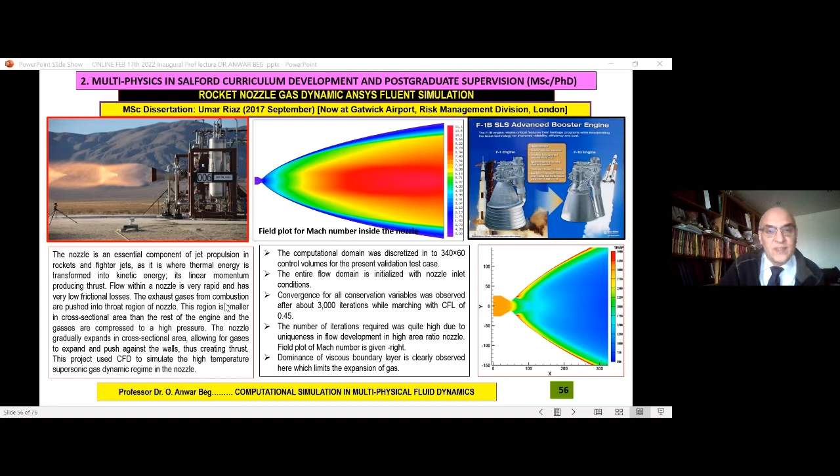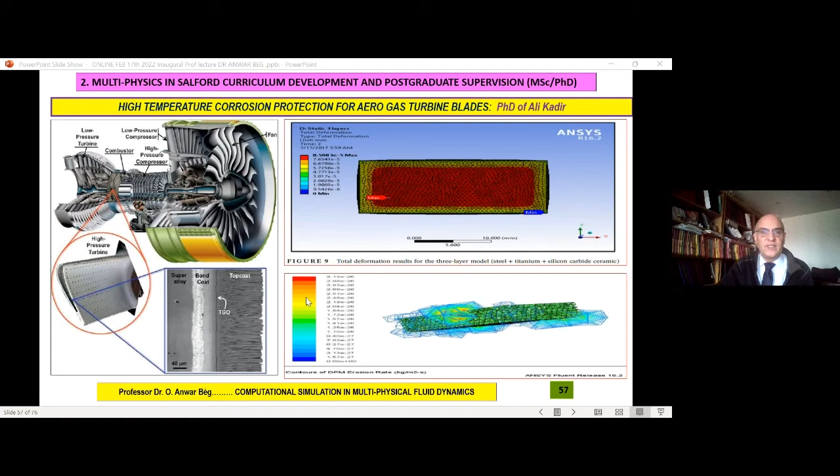A PhD example was Ali Kadir, who I supervised. He received his PhD last year, and you'll meet him later when he does the question and answer session. He studied novel nano coatings to protect gas turbine blades. And not only did he do experiments and show that the current technology in industry is lacking massively because they're not using nanoscale materials, they're using microscale materials or micro coatings, but he also computed erosion rates. All of this was done with multiphysics for a particular sample on one gas turbine blade with Rolls-Royce data.

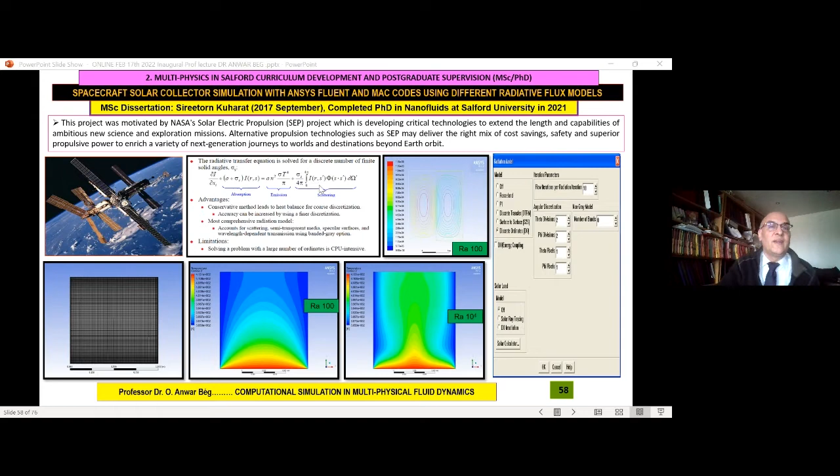Dr. Kuharat, as she is now, did an MSc project in solar nanocollectors, and she was interested in how you dope existing fluids like argon gases, which are inert, for long distance space missions. She also used ANSYS, and she showed that buoyancy effects, even in outer space where you get gravity changes when you go near different planets, can have a dramatic effect on the photovoltaic efficiency, but you have to solve the radiative heat transfer equation. So we've also done a lot of work with undergraduates.

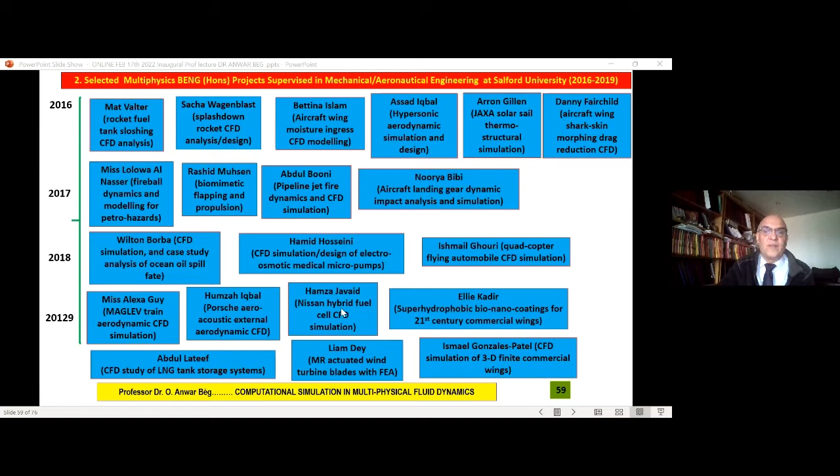I won't read them all out, but a few examples are pipeline jet fire dynamics, quadcopter simulation, Nissan hybrid fuel cell simulation, and also magnetorheological actuated wind turbine blades. Last year, we ventured further into things like robotic swimming, where Agata and Debbie looked at snake and dolphin-inspired robots for monitoring the ocean, which is a very important part of the planetary ecosystem. 70% of Earth is water. We have to look after our oceans.

But we also looked at things like inner ear hydrodynamics and bioacoustics, because Hams was interested in hearing aid development. And this year we're looking at things like roller coaster vibration, delta wing shock aerodynamics of the Boom XB-1, which is a new commercial supersonic jet being built in Colorado, and magnetic vortex swirl engines, which Jennifer studied.

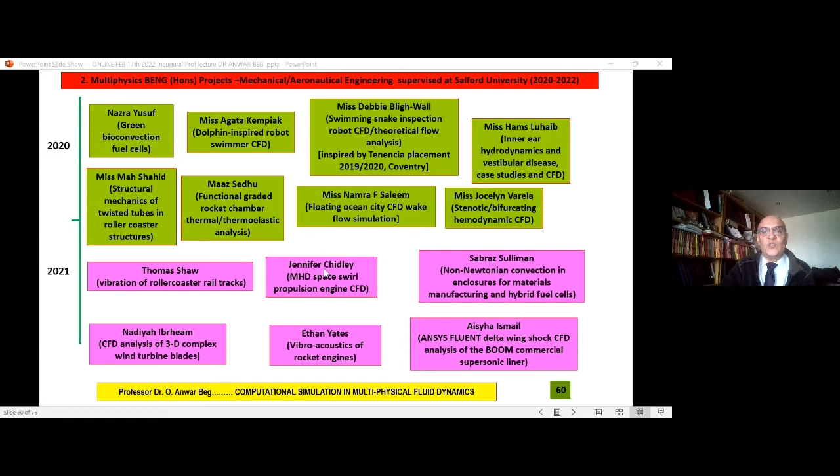And quickly to mention the work of Arron, he looked at the solar sail, which uses radiation pressure from the sun to actually drive a spacecraft using the solar wind. The solar wind moves at 500 kilometers a second. That's approximately 1,500 times the speed of sound. It's an enormous velocity, and it can be harnessed by going into outer space, opening up this structure, and then building a sail, which can then propel the spacecraft.

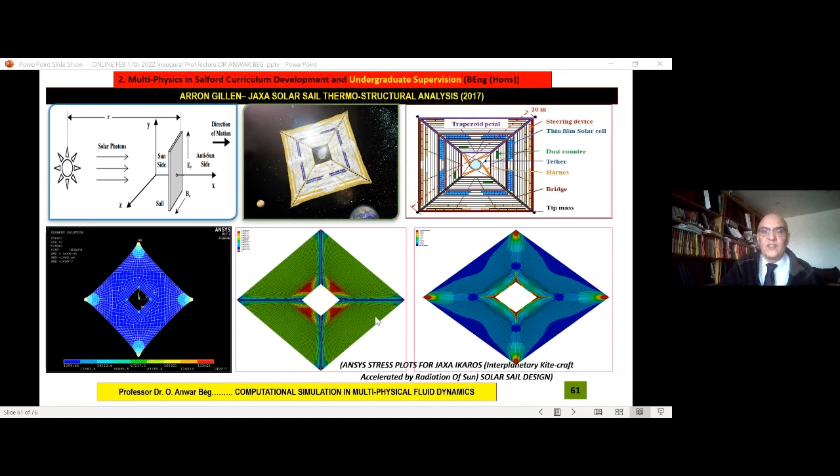So this was done 5 years ago. It was called the IKAROS project. Also, we looked at combustion simulation with Lola, who now works at Shell. And she simulated in ANSYS how a fireball expands, because it's a very major problem, obviously, when you're dealing with the fuel industry. Other projects we'll be looking at in the future are spinal stress analysis, which Molly will be studying next year, and possibly snake swimming robots, butterflies.

How have we communicated our work? Well, as Karl mentioned earlier, very briefly, some books I've published in the past. This one in particular allowed me to interface directly with one of my heroes based at Princeton, who I'll mention later, and introduced me to micropolar fluid dynamics, and the first book in the subject was written by me 10 years ago on computational methods in that area. Currently, we have a very good profile on Google Scholar, and this is an important part of how we disseminate our work to the international community.

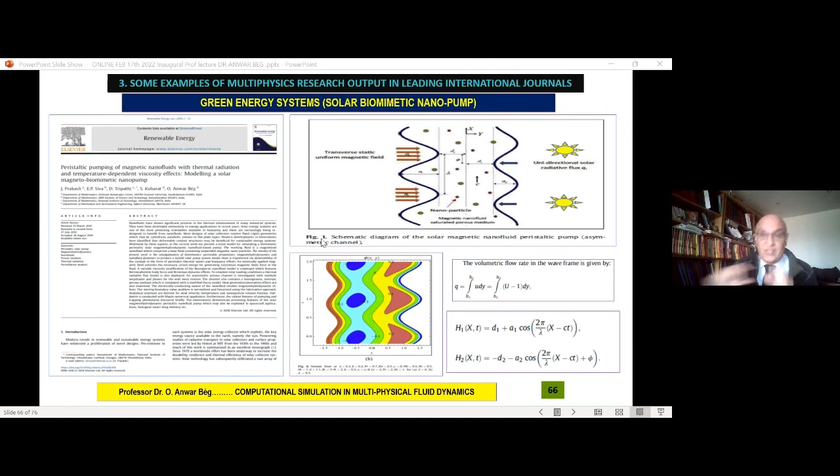Some recent publications in renewable energy: we've simulated a new kind of solar pump using multiphysics, published it in Renewable Energy Journal, where we combine nanofluids, magnetohydrodynamics, and that peristaltic mechanism I was mentioning earlier, so that you can self-propel the fluid and replenish it without using a piston pump system.

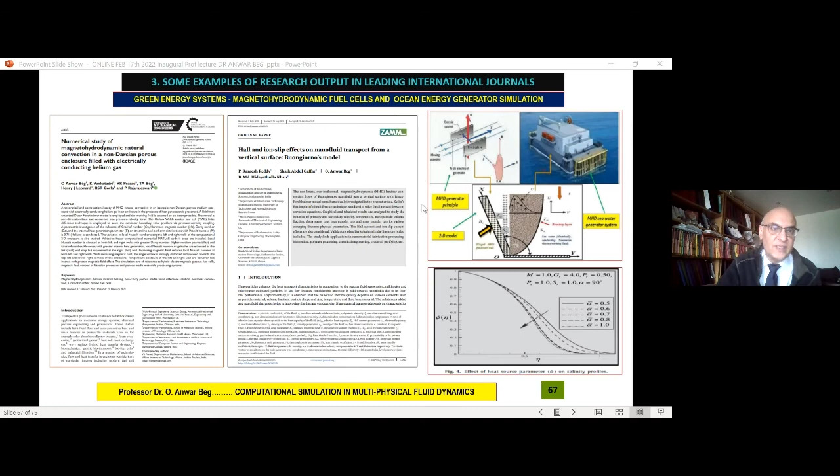We've also explored things like ocean magnetic energy generation. This was inspired really by Faraday 2 centuries ago. But recently we've published work in ZAMM, which is one of the world's leading journals in applied mathematics, founded by Richard von Mises and von Karman in the 1920s. And we've shown that by particular combinations of magnetic fields and materials, you can double the efficiency in an MHD, or magnetohydrodynamic energy generator. This work was done with Dr. Leonard.

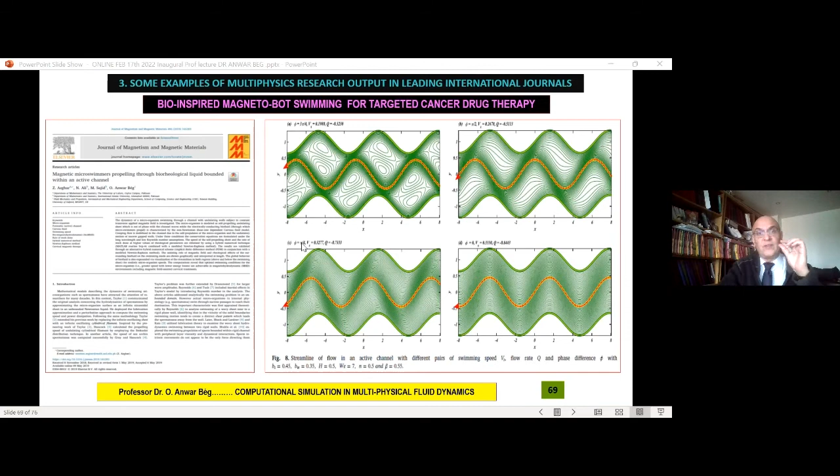We've also looked at things like orthopedic lubrication for prosthetic replacement. If you've lost a knee, you can use magnetic rheological materials to build artificial legs. So there's a very diverse range of applications there. Also nanobots for cancer drug therapy. We've recently worked in this area where we're simulating the robot at a continuum level, not on a molecular level. And this can be done using multiphysics.

Most recently, we've been looking at superparamagnetism, which is where the magnetic field intensity can switch very quickly, depending on temperature. And this can be used in laser hyperthermia treatment in medicine. And again, magnetohydrodynamic energy generators using helium gas, which is also growing popular. Targeted drug delivery, which I'm working on with Dr. Kadir.

And recently we've started looking at Taylor dispersion, which is where one material moves through another, a bit like bubble bath. If you're taking a bath, you mix the bubble bath and it disperses through the hot water. This is known as mass transfer, but a specific mechanism that's important in medicine is called Taylor dispersion. So we've made some progress on that. Some of the work we did in computational medicine was rewarded last year when we won the first prize at the Materials of the Future Smart Conference in Qatar. They were very impressed with the work that we've done.

So conclusions, basically, we're moving forward in these areas, and we're also exploring grants largely through the EPSRC with Vera Barron and Dr. Rachel Wooley. We're also expanding our research group. We've produced hundreds of articles, which you're all welcome to access on the University of Salford Institutional repository.

I have 11 cats, and many of them accompanied me when I prepared this presentation, notably Archy, who's very popular with my students because during COVID we've had to do MS Teams lectures and on Blackboard, so many students have met my cats.

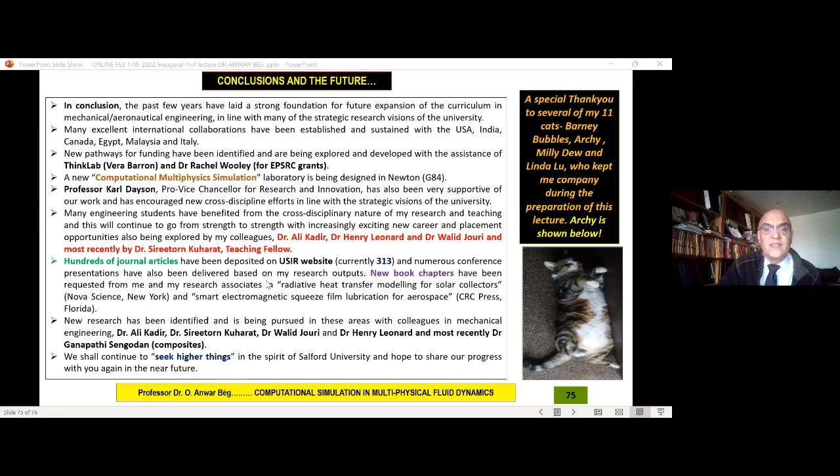And we're continuing to seek higher things in the spirit of Salford. That's our objective. Just to finish off, it's very important in order to inspire other people, which are our students and colleagues, one has to be inspired himself. So the people who inspired me in my life were Richard Feynman, the physicist, one of the greatest teachers of the 20th century, who coined the word nanotechnology. He was based at Caltech, legendary physicist. I recommend you watch his YouTube videos. I've also mentioned James Clerk Maxwell, another great hero of mine, who the Maxwell building is named after.

And then finally, in the last 20 years, a major mentor I've had, in the first 10 years of the 21st century, who died in 2009, was Professor Eringen, who revolutionized modern fluid mechanics. So the micropolar model I mentioned and the nanoscale models that we're using in our work were developed by this individual. So that concludes my presentation.